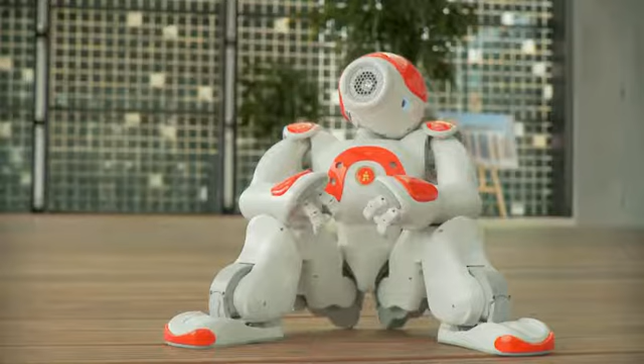I want to come with you.

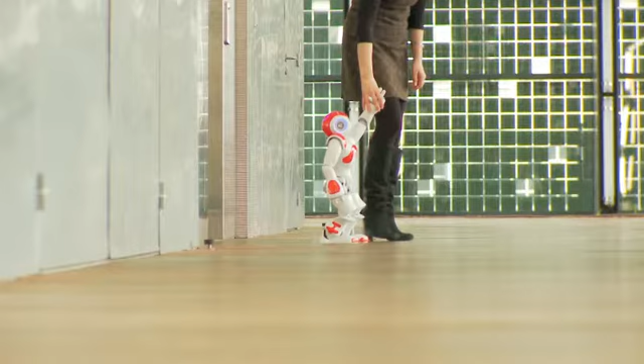Our goal with robots is to have robots helping people, and not only the geek. I want to have robots helping everyone. But in order to do that, we need to have the robot accepted by people.

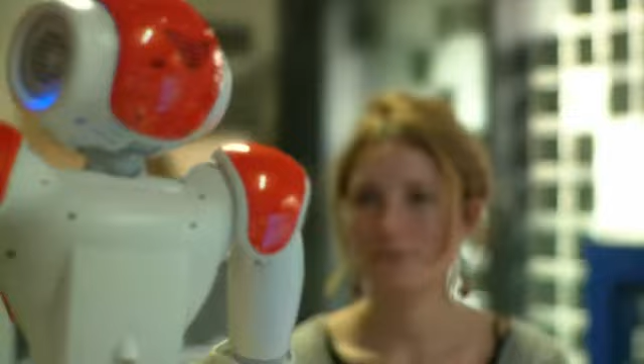I'm Bruno Maisonnier, head of Aldebaran Robotics, founder and CEO of the company. Give me something, please.

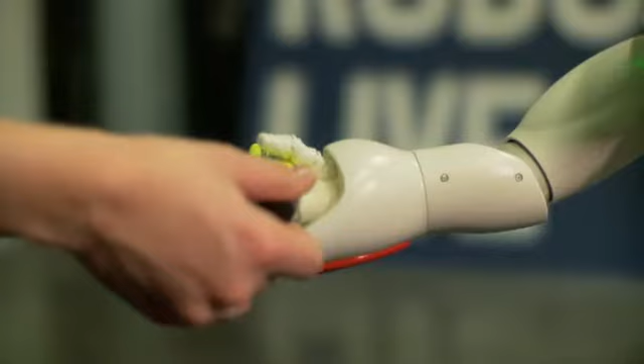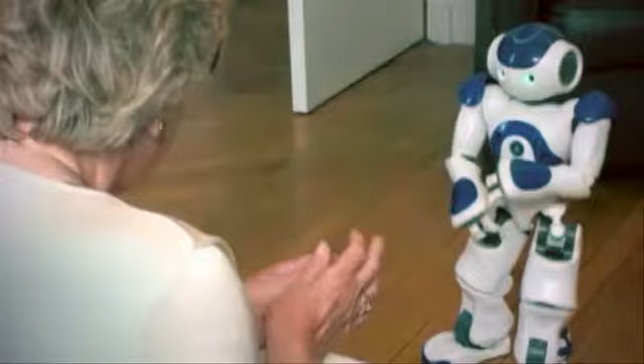We think that the robotic market is going to be huge in the future. And this comes from the simple fact that the world population is aging very fast. And we need robots to do whatever they need at home.

What do you want me to do? When people are depending on someone else and need to have someone else helping them, they are in a secondary position. But when they have a robot doing that, they are in the first position. They are leading.

Notre Dame University, United States, they are really working with robots helping autistic kids. We discovered that robots are objects they can interact with, they are comfortable with interacting with robots, they like it.

The first impression that you get when you see the robots is the outside shapes. If the shape, if the form is too aggressive, you won't interact with that robot.

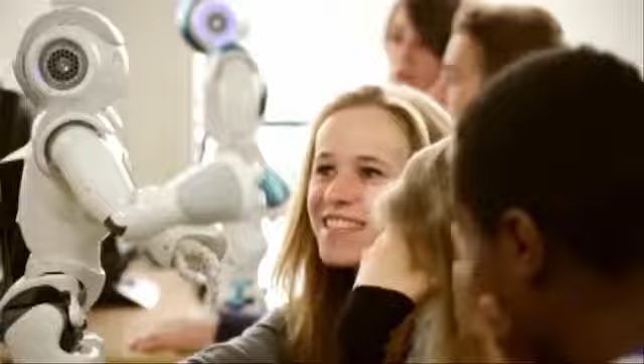There are many people ready to develop softwares, but we are just lacking robots. We are just missing robots. So that's why Aldebaran began with a platform for providing all those who want to explore this new world, who want to be part of this revolution, to be able to do it.

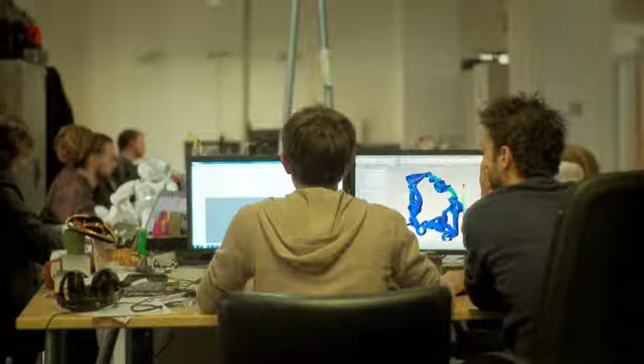I've been working for Aldebaran Robotics for 5 years as a mechanical engineer. I especially work on designing gears and integrating motors into the platforms we develop at Aldebaran.

Well, like Ludovic, I am also a mechanical engineer. I mainly work on the shells, but also on internal parts and the structure.

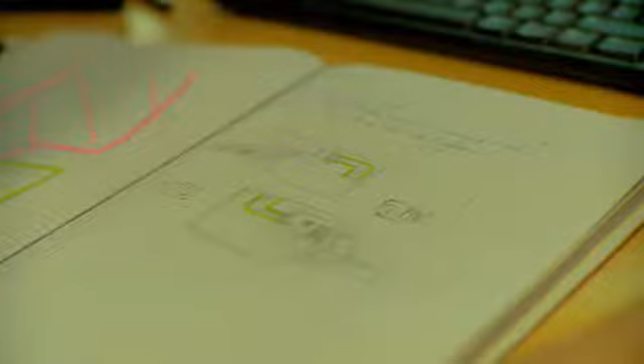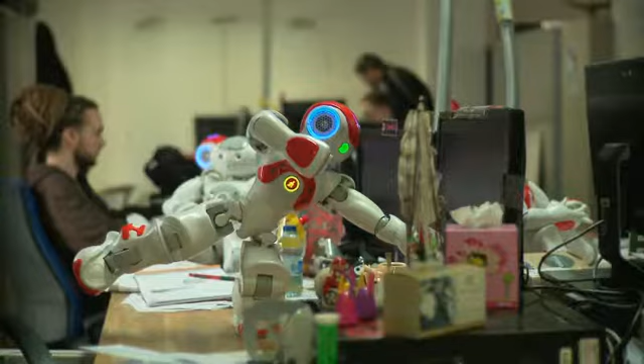For each project, the process is similar. We start with sketches, essentially 2D images, that we then translate into digital data and 3D volumes using SolidWorks surfacing tools. This gives us the ability to rotate the pieces and robots in the space and to improve the design when it's not as pure as we want it to be.

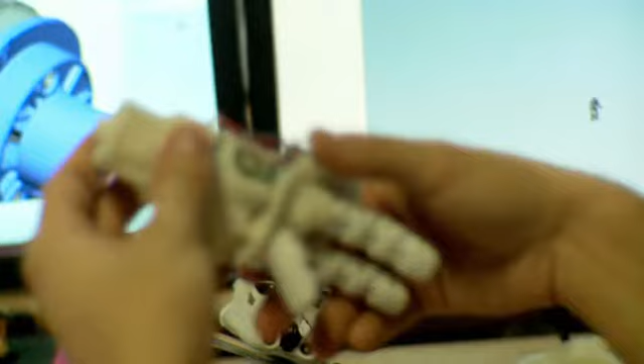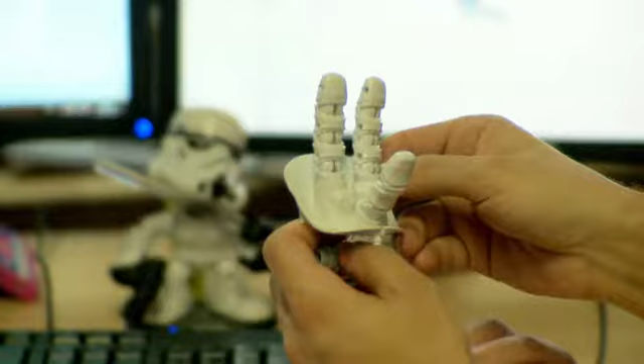So we start with the exterior design of the hand as we have here. It is smaller than a human hand, it's the size of a small child's hand. And inside there are over 100 parts just for one hand. In addition to all mechanical constraints, we have 2 degrees of freedom that we have implemented in this hand, and SolidWorks allows us to look at all the possibilities and optimize the mechanical design inside the hand.

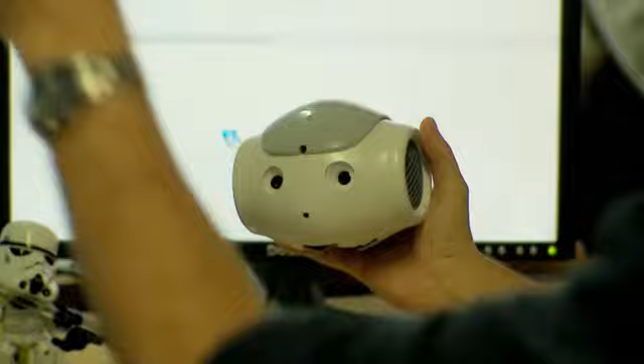Even more complex is the robot's head, which combines mechanical, electronic, and optical components, like cameras, for example. One might say that all of NAO's intelligence is gathered in its head. There are also LEDs, microphones, and speakers.

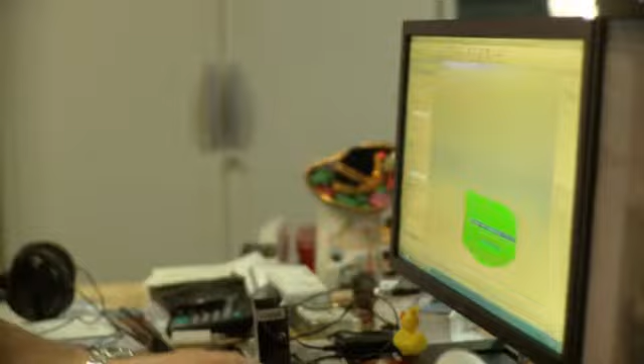We use SolidWorks simulation, which allows us to generate digital models and know if the part will resist to shocks or not, based on stresses we apply to it. And once we have proceeded with validation in SolidWorks, we can move on to production.

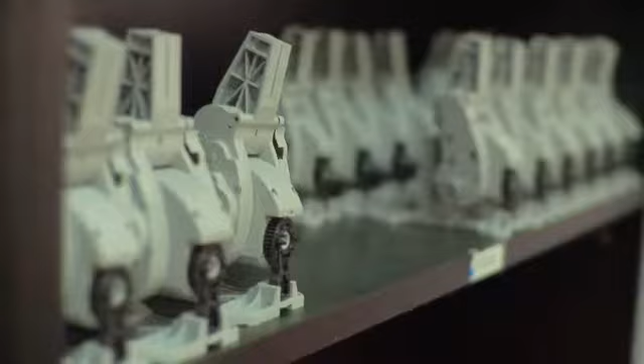We use SolidWorks in order to project the product into the future, and we can really optimize, really improve the parts before it exists, before it is manufactured. You have to know that into that robot there are more than 1,200 plastic parts.

On my team there are 45 people working on the design, and I need to orchestrate the daily work and make sure that when we create new parts, the version is correct. So for that we use EPDM, and it helps us to focus on innovation while EPDM is taking care of the structure of the project.

I hate the techno stress. I don't want to have devices that are asking me to invest intellectually to understand how they're working. So I don't want my robots to create techno-stress to people.

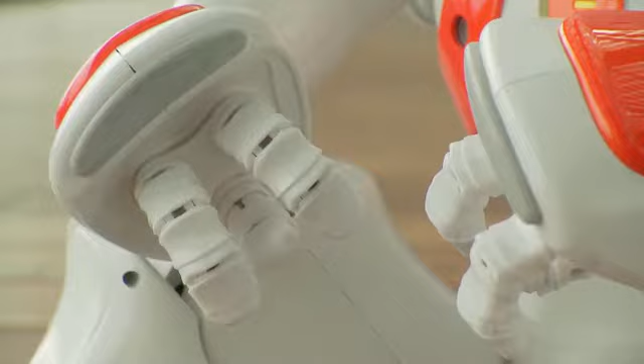When you want to change the world, to improve things, you have to go beyond what you are able to do. You have to decide to go for something you don't know how to do. It's a new territory to conquest.

Shall we try something new today?